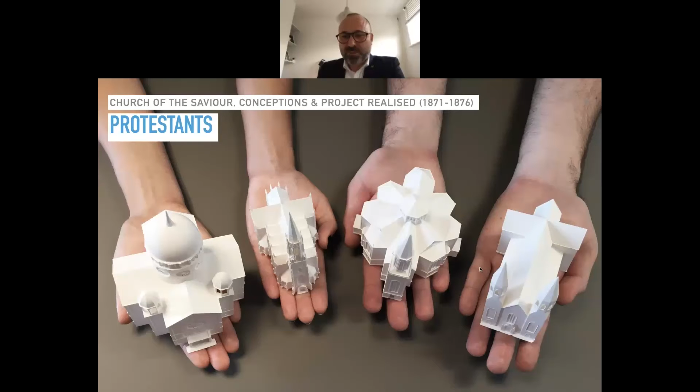This is the one from the Jews, and this was the one from the Catholics at the same time. The other one was from the Protestants, where we only have the competition in text form. We tried, with our students, to make a reconstruction of the proposed competition entries for the Church of the Saviour, based on the text and description.

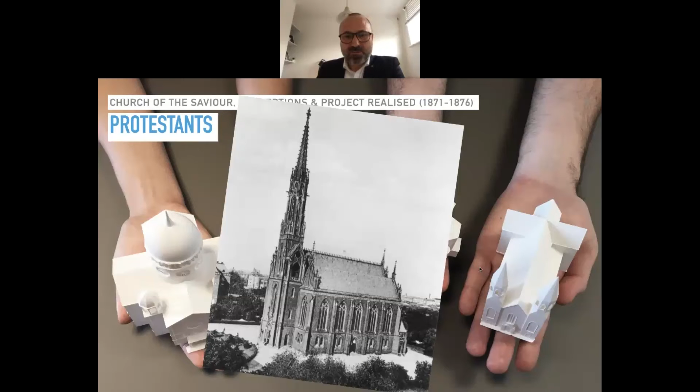And the one that was later built is this small church. So this was also an aspect we wanted to make research on.

On the other side, we have natural persons like Edwin Oppler, a Jewish architect who was a star architect in the field of synagogue architecture. Around the same time, a few years earlier, he made the project and built the Hanover synagogue, which is comparable in many aspects with the synagogue in Breslau.

Of course, we also wanted to make a survey on the pattern reception - synagogues that are influenced by the architecture of Edwin Oppler and his manifesto.

To sum up, we had something like a mind map at the beginning of the project, where we aimed to capture all of the social-cultural context concentrated around the planning and construction of the new synagogue.

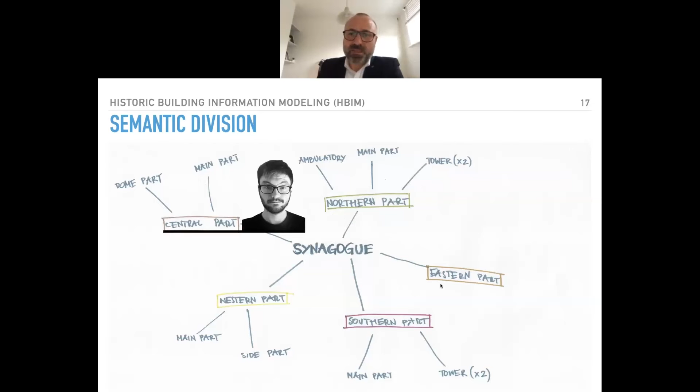Coming back to the historical building information modeling that we used, we subdivided the synagogue. Now we will present the process of the reconstruction. As we had many actors, students, and research collaborators in our institute, we tried to divide the work within three semesters, so we worked on it for 1.5 years.

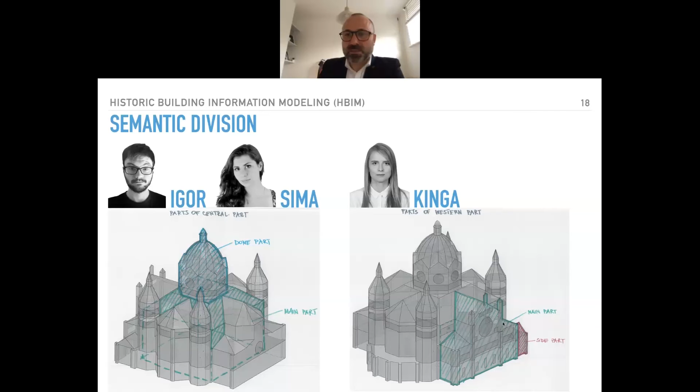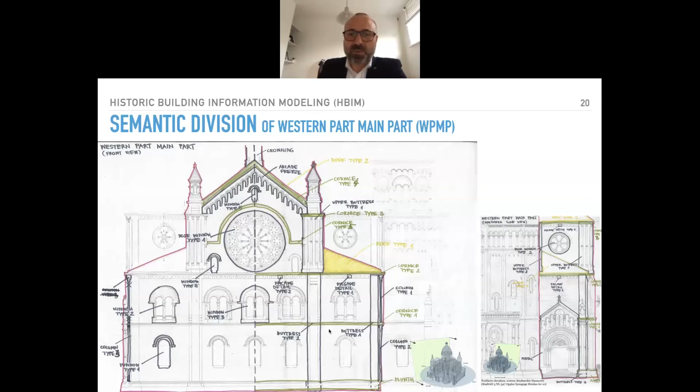In the beginning, we divided the work so that Kinga reconstructed the main parts and the western parts, subdividing it into two parts. Then, based on the historical resources, we identified all the objects, as you see here. We took the historical sources and made an analysis of what objects we had to model, naming and collecting them so we could compare them with other architecture. Then back into the 3D software, in our case Archicad.

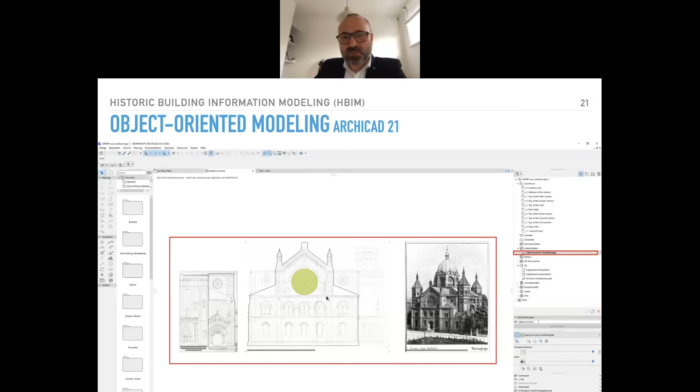This is a case of reconstructing the rose window. We are implementing the historical source and showing also what we are reconstructing. And here you see there are already modeled 3D objects of the rose window.

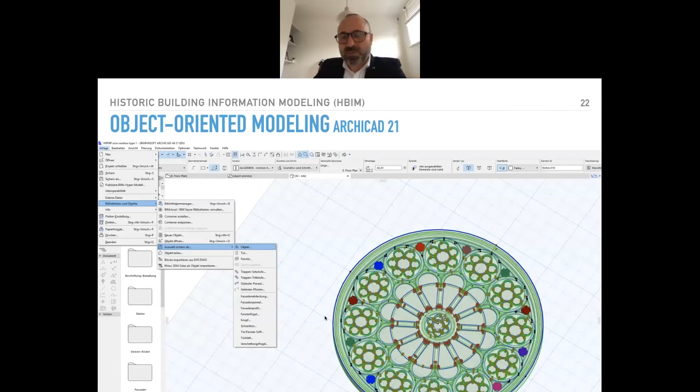Here we have the possibility within this building information modeling software, currently in use in civil engineering, to add attributes to these objects. In our case, we prepared a new attribute that is the connection, the URL, the web link to our virtual research environment with all the mapped information.

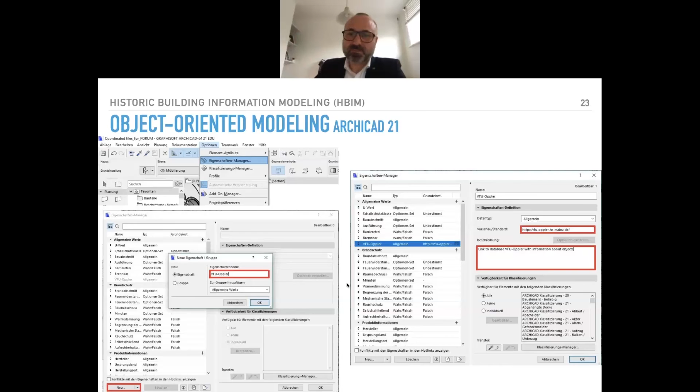So you see here the rose windows within the synagogue, and in the settings, if you open it, you see that we added our own field with the information about the link to our virtual research environment.

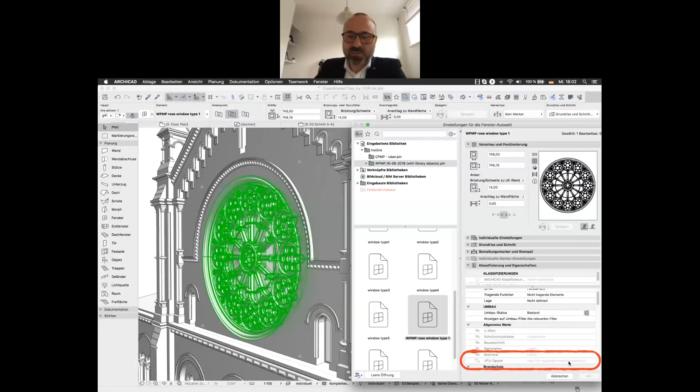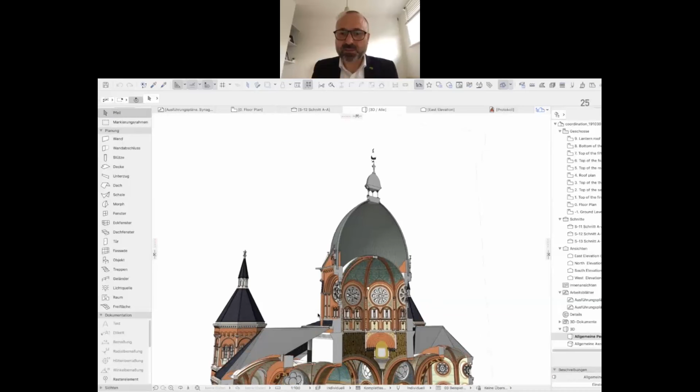And you see here the whole synagogue, which combines and unites all the elements. We already textured the interior based on the very nice colored section that we found in the archive in Hanover. So this is the whole architecture, and now I will pick one element.

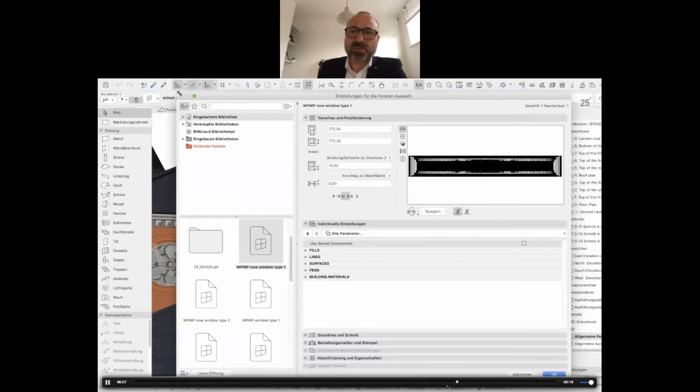So we see now the attributes that belong to the object of a rose window type 1 that Kinga reconstructed. Under classification and settings, you see our link to our virtual research environment. So all the objects in this model have additional information linking this 3D model and representation with our research data.

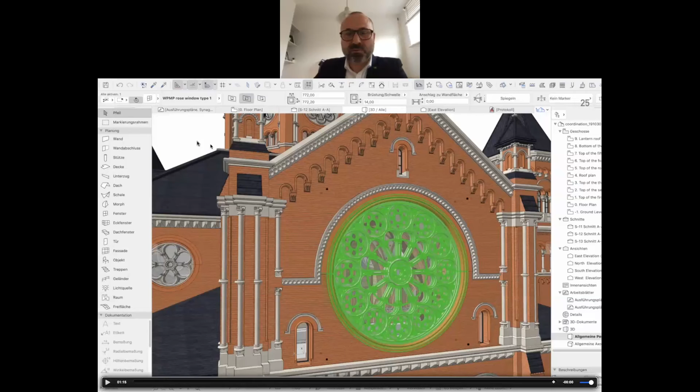To show you our research data, we have the possibility to export this model out of Archicad via the international standard, the so-called IFC file, so it can be read by many other software packages and is sustainable, interoperable and reusable.

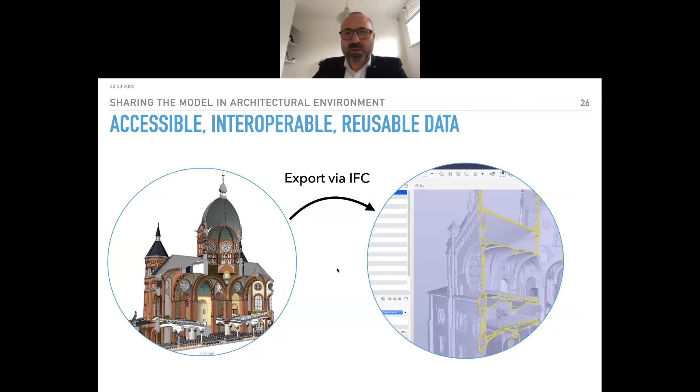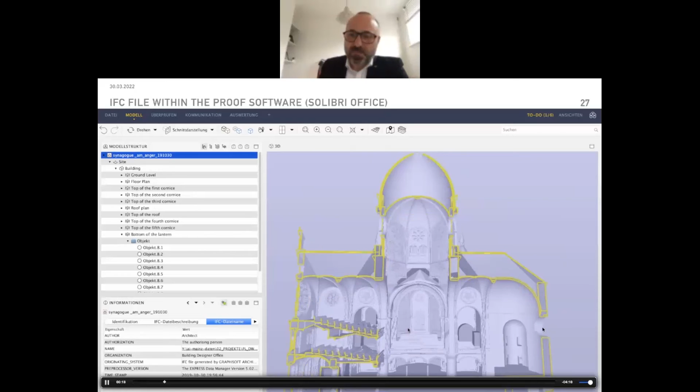After exporting via IFC, we can open it in web-based solutions like Solibri, where you see the whole structure of the model, and you can share this model easily. You can check this model, making sections as you want. But the most interesting thing is that this model is full of information, the objects.

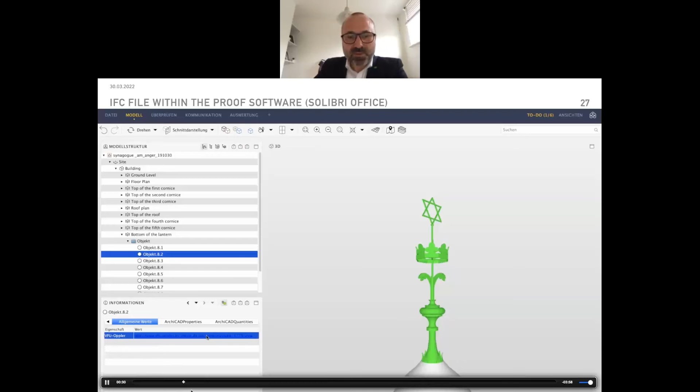For instance, you see here now the link. So we are now at the crown, bottom of the lantern crown, and you can click on it, and you see this information coming from Archicad that we added, the link to our virtual research environment. We can click it, and now we are already inside the research environment that is open. You can visit it under this address.

And here you see the research activity of a reconstruction of this crown. Above, you see all the other elements. We have objects, sources, research activities, historical events, natural persons.

So you will find here, for instance, the author of this model, but also historical persons like Oppler or the Jewish community. And then we have all the metadata accompanying this research activity. For instance, the type is 3D reconstruction, which we link with Wikidata and Wikipedia.

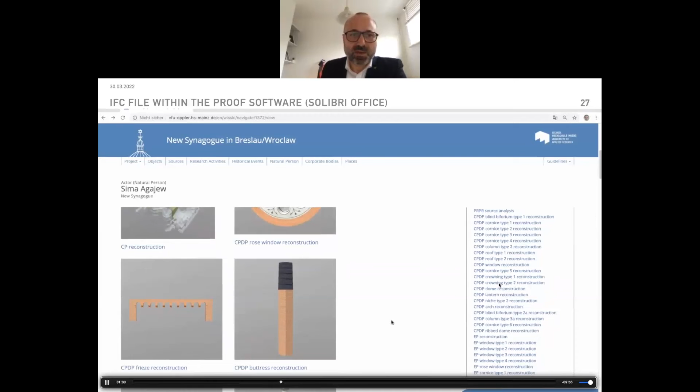Now we can see Sima Agajew as a natural person, who is a member of our institute, and our institute is also captured in this system, with all members linked to the institute. Below, in our virtual research environment, you can see all the reconstruction activities carried out by this natural person, Sima Agajew.

So all the elements that she identified and modeled are here. This is her division and the identifying of the objects, which is also uploaded as a source. She used the historical source to make this sketch and this identification.

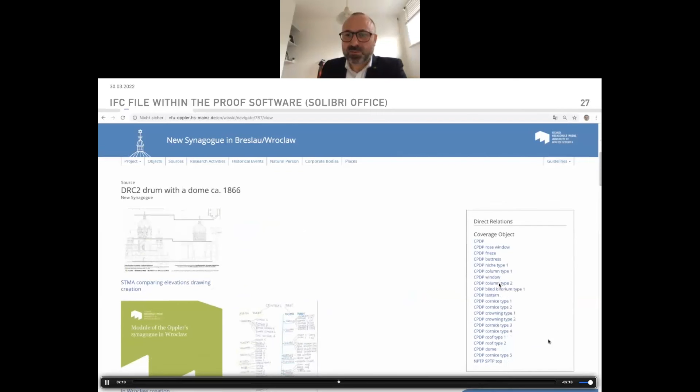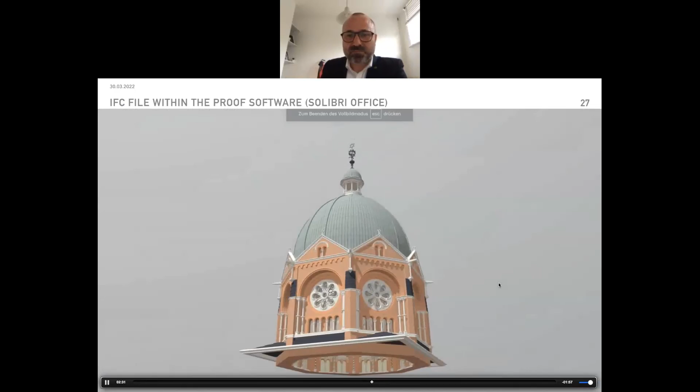We also have in our data set the metadata and the rights holder for this historical source, and we see which objects are represented in this historical source. I will repeat this whole pathway in the next slide, because we wanted to show here just the linkage between all the elements and the visualization supported by the virtual research environment.

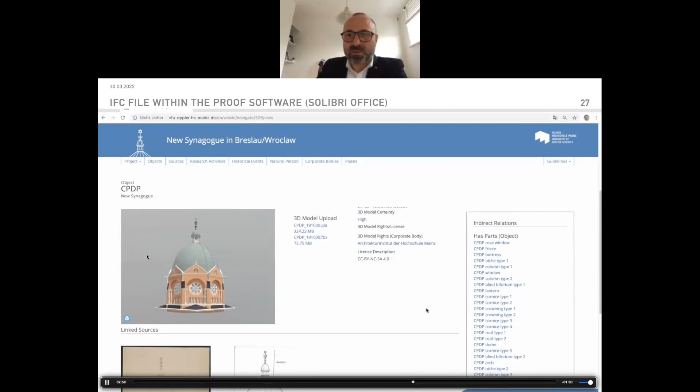So this is now the object of the central part, dome part. And you see here that this object has a reconstruction activity with the rights of the models. You can download the 3D model in different file formats. And you see here that this dome has all these elements inside, and is represented with historical research, historical sources. The interesting thing is that you see here the object is also related to others.

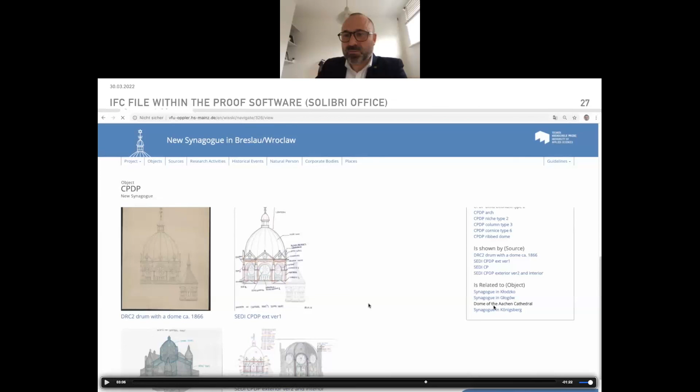So this dome part, we wanted to capture. You see that we have the possibility to show relations, and this dome part is related to a synagogue in Kłodzko and Głogów, and also to the dome in Aachen and synagogue at Königsberg, for instance.

And if we click now to the dome of Aachen Cathedral, we have here that it is a part of the whole Aachen Cathedral. So via this part of connections, we can capture the whole architecture.

And in our case, this new synagogue in Wrocław, we did also this survey on the other projects from Protestants and Catholics. And this is the starting point of our virtual research environment where we introduce the project.

But an interesting thing here may be on the starting point of the project, the landing page, is that we also take out of our database the locations, and show them on the map, locations on all other synagogue projects of Oppler. So for instance, we have this backlink from this visualization on the map to the entry of the object, where we can capture all the data of this synagogue.

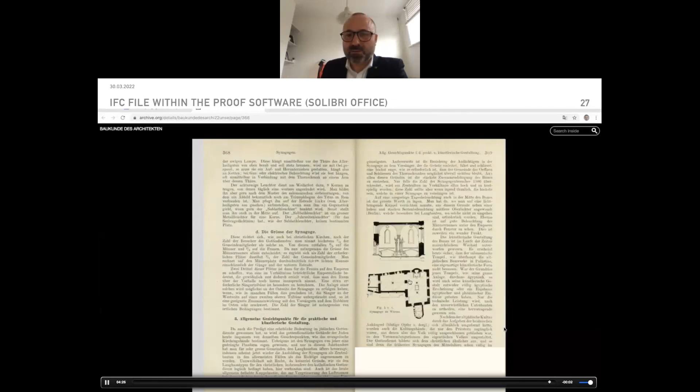And we have also here, similar to other objects, it's shown in a book. And now we have these connections to other repositories. For instance, this book on synagogues, which is here in archive.org, another repository. You can just go there and read it online. So these are the other linked data resources that we can connect to.

And we showed you now the connection with our research, virtual research environment and the linkage to the 3D model. So just to repeat, we have our 3D model where additional information is added to each object. And we showed you that we have a possibility to click on each element and get directly to the comprehensive management of data in our virtual research environment.

And we have in the research activities the description of who modeled this element and based on which sources. And we are capturing also objects that we are representing with our 3D model. But we have also the relations from our objects of interest to other and similar objects that we identify.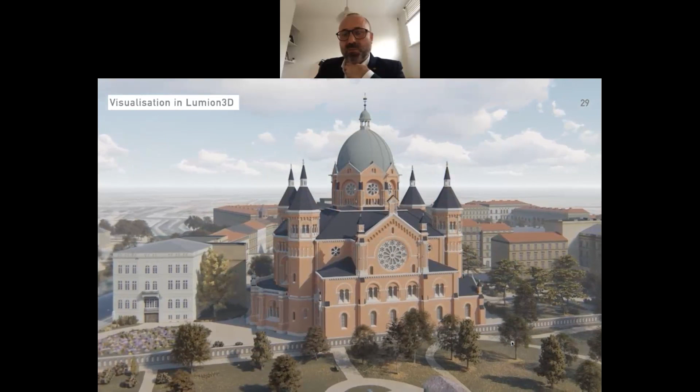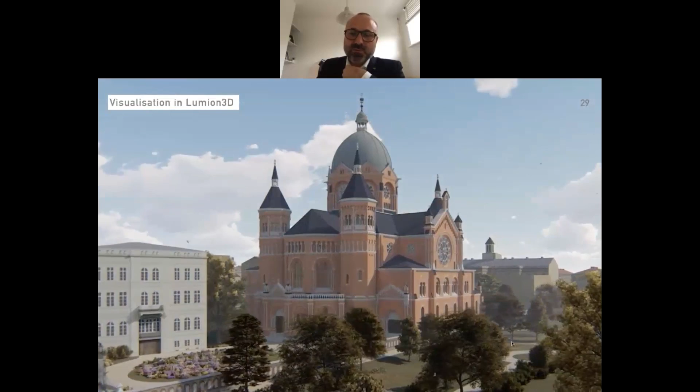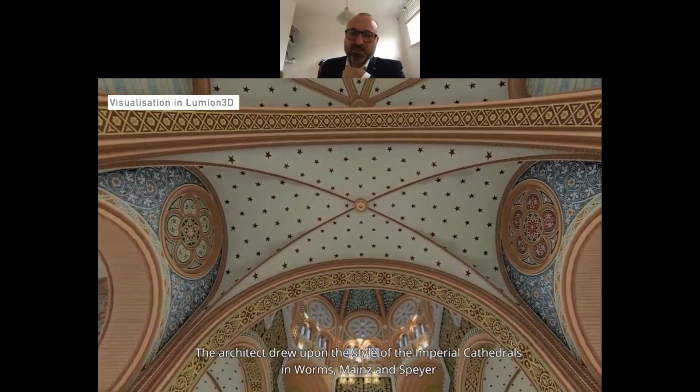And then we have also this possibility to interlink objects to other digital resources, what is shown here. So our goal was in this project to show a new approach in digital visualization, creating a digital memorial landscape. And we mean with this to create a research data set that is comprehensive. It is not just prepared for visualization like here, but it is also prepared for a digital humanities approach. So you can grab and use our data that is connected to the 3D model in a way that it is operable, and you can make operations with it.

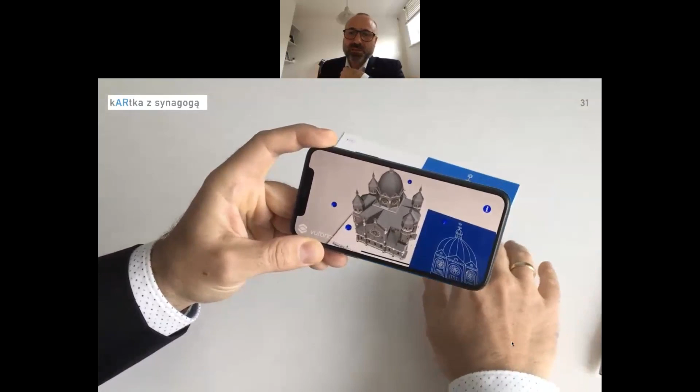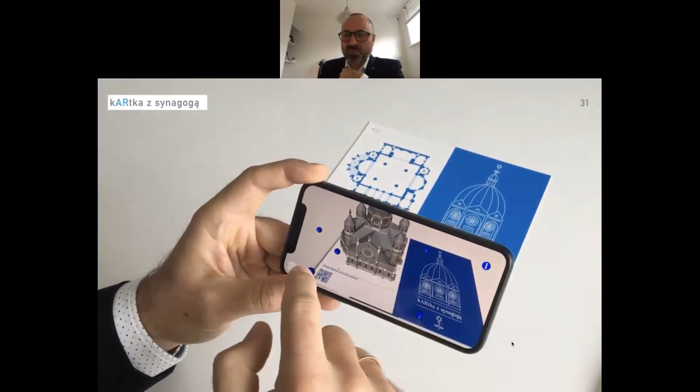So beyond the 3D visualization, we have also this augmented reality app for dissemination. This is an additional possibility with this project, that we can make different derivatives out of the data. So we can use it as a database that is human and machine readable using the CIDOC-CRM data model. But we can then also make different promotional materials, like these postcards that we send from Breslau to the whole world. So thank you for your attention at this point, and I hope that you got an impression of this digital humanities project.